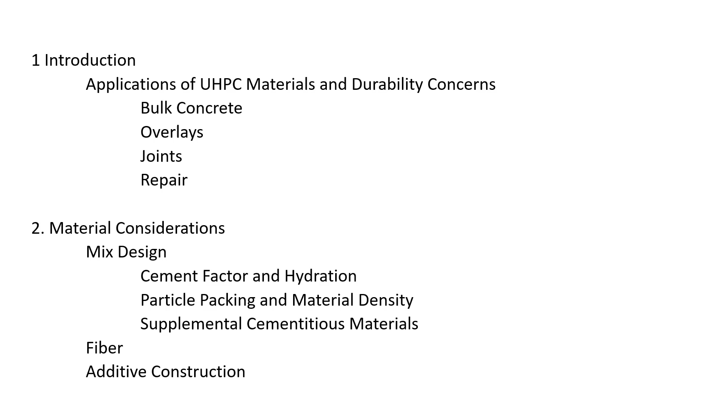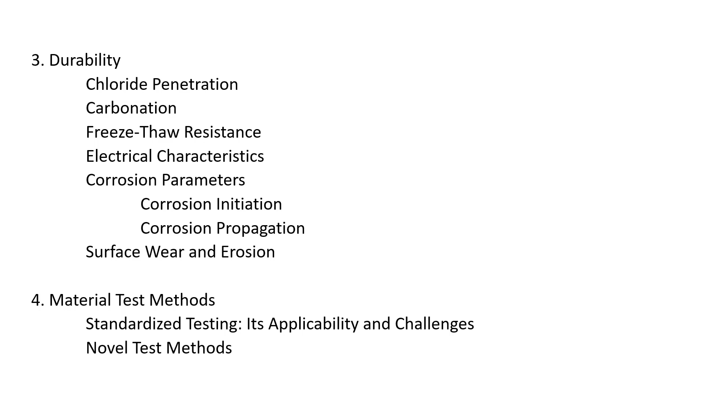Durability testing and durability behavior of UHPC, covering chloride penetration, carbonation, freeze and thaw, electrical characteristics, corrosion parameters, and surface wear and erosion or abrasion. Material testing covers the standard material testing methods for UHPC as well as novel testing methods, really focused on the durability aspect of UHPC.

Some case studies in section 5 of this chapter cover existing bridge construction, ABC, and other structural components, as well as challenges and the prognosis for future use of UHPC.

Chapter 9, Dr. David Garber from FIU is the leading author of this chapter. This chapter will have an introduction and a general introductory primer, mainly for concrete superstructure. Fully precast concrete superstructure includes section 3, covering different typical options for ABC.

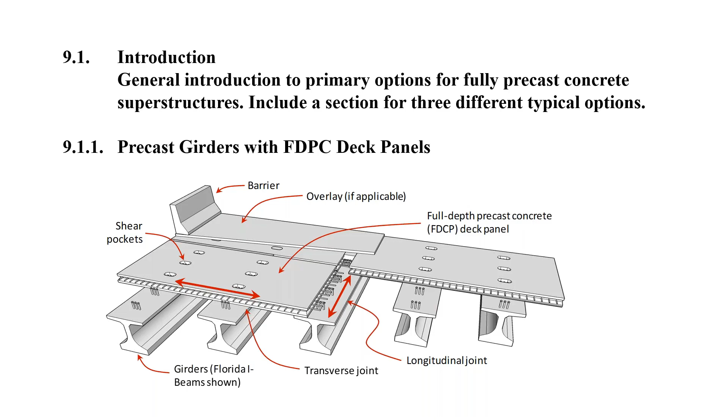The first option is precast girders with full-depth concrete deck panels, as you can see on the screen here. Other options include deck bulb T girders, and another option using adjacent precast beams.

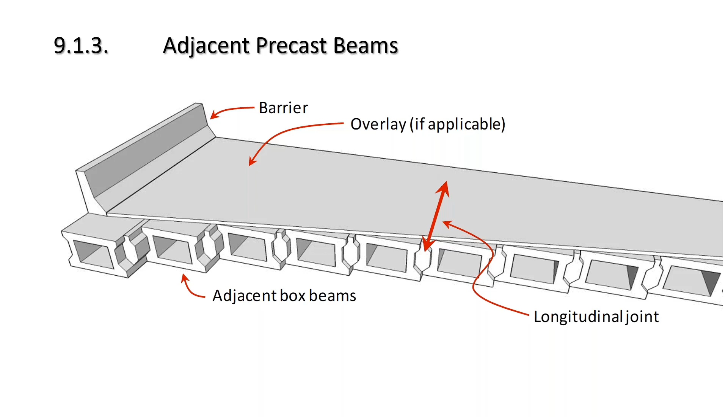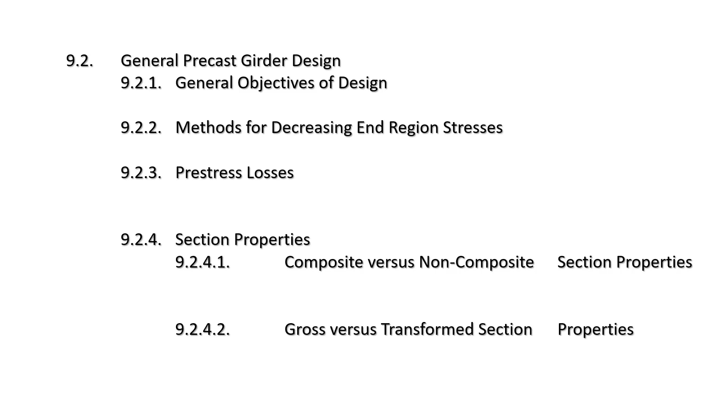Continuing, I don't want to keep reading the slide, but you will have a chapter in general precast design covering how to calculate the pre-stress losses, how to calculate the section properties for composite, non-composite, and transformed sections. A general design procedure with steps, from choosing the cross section up to the end of designing the end anchorage zone and reinforcement.

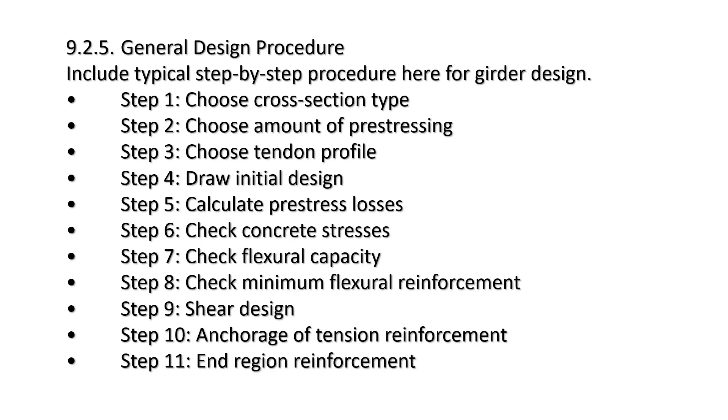Also covered are full depth deck panels, from the section of work that Dr. Garber conducted a few years back, and also the partial deck precast deck panels.

Chapter 10, I believe Dr. Murabi is the leading author for this one. This is almost a complete draft and hopefully will be included in the entire handbook as a chapter that Dr. Murabi is leading.

Chapter 12 is led by Dr. Bijan Khaleghi. He is leading the chapter related to ABC seismic considerations, with an introduction covering objectives, response characteristics of bridge systems and components, potential causes of earthquake damage in bridges, and seismic hazard and performance, mainly an overview of the effect of seismic activity on bridges.

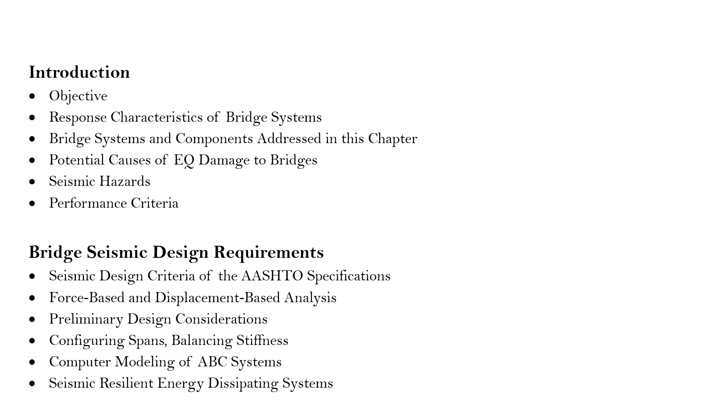The bridge seismic design requirement is the second outline section, covering seismic design criteria for AASHTO specifications, the difference between force-based and displacement-based analysis and design, preliminary design considerations, how to configure spans to balance stiffness, computer modeling for ABC systems, and seismic resilience systems with energy dissipating systems.

Structural considerations include foundation and all seismic protective systems, substructure elements, abutments including integral and semi-integral abutments, piers and wall piers, bent caps and open frame bents, and also soil-integrated bridge systems, which is another option for a seismic resistant frame system for bridges.

Details of current practice range from abutment connections to pile cap connections, superstructure continuity over piers, precast column to cap connections, segmental columns, and prefabricated concrete bridge systems.

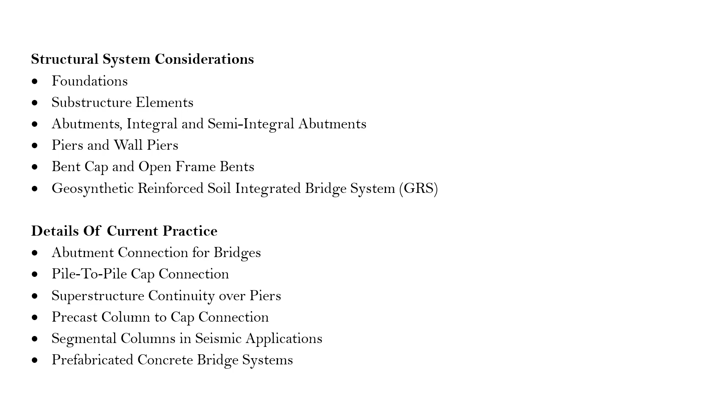Also covered is the application of seismic research on ABC bridge elements and systems: superstructure and continuity types, superstructure with emulative or hybrid connections, some systems for superstructure, substructure with self-centering capability using pre-stressed strands or tendons in either post-tension or pre-tension, and substructure with alternative energy dissipation mechanisms.

Chapter 14 is accelerated repair and upgrade. I'm leading this one. Basically we'll have an introduction, and you can expect to see different sections within this chapter.

The second section is accelerated repair of bridge superstructure, focused on the superstructure. You will have subsections on what type of damage occurs in the superstructure, materials for accelerated repair of superstructure, methods of repair, a summary of key accelerated repair techniques, and featured projects showing accelerated repair for superstructures.

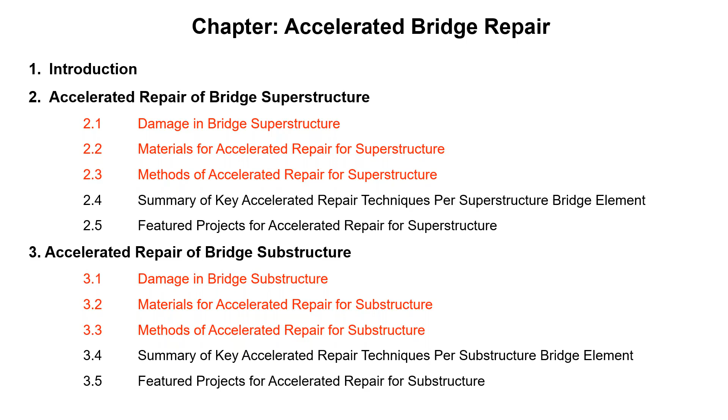The same concept applies to section 3, but for substructure. You will identify different damage in the substructure, what kind of materials are commonly used for accelerated repair of substructure, what methods are used, a summary of the most common techniques, and featured projects.

Section 4 focuses on foundation, covering all the different materials, methods, and featured projects for repairing bridge foundations if damage is located there. At the end there is a design decision section, conclusions, discussion, and references.

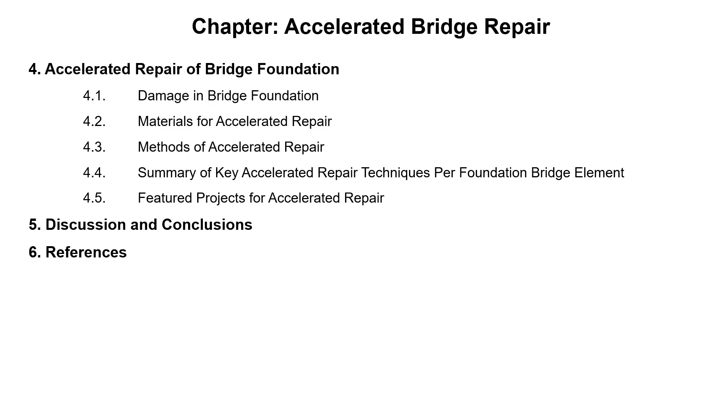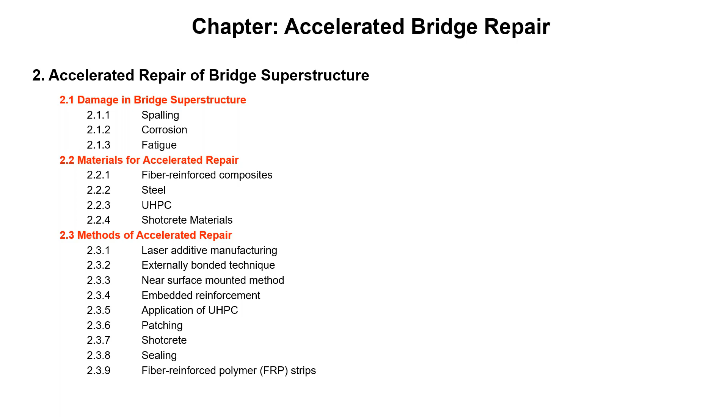To expand a bit on superstructure, you can see different types of damage: spalling, corrosion, fatigue. Different materials are used: fiber reinforced composite, steel, UHPC, and shotcrete materials. Different accelerated repair techniques range from application of flowable UHPC to shotcrete materials, patch sealing, and externally bonded techniques.

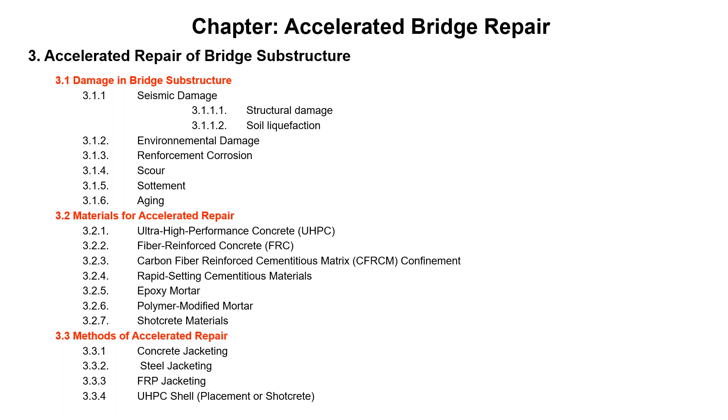The same can be applied to substructure, where damage also includes seismic damage, so you can expect structural damage due to seismic activity in columns, and you can also expect soil liquefaction.

Chapter 16 relates to design examples, which are used throughout the handbook, contributed by most of the leaders of the different chapters I mentioned. Chapter 16 will have design examples, as shown in the following slide, where I'm showing one of the examples for a folded steel plate girder.

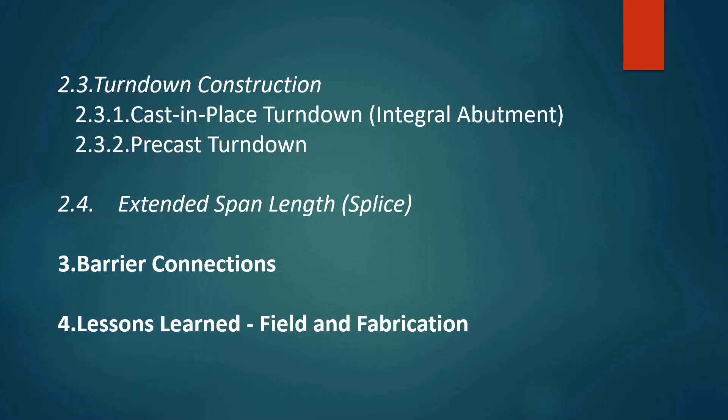You will expect in the chapter introduction an option alternative for the design for closure joint, either longitudinal or transverse, precast option, either full depth or partial depth. What is a turn down for construction, extended service life, span length, barrier connection, and also fabrication and field erection. And this is a lesson learned.

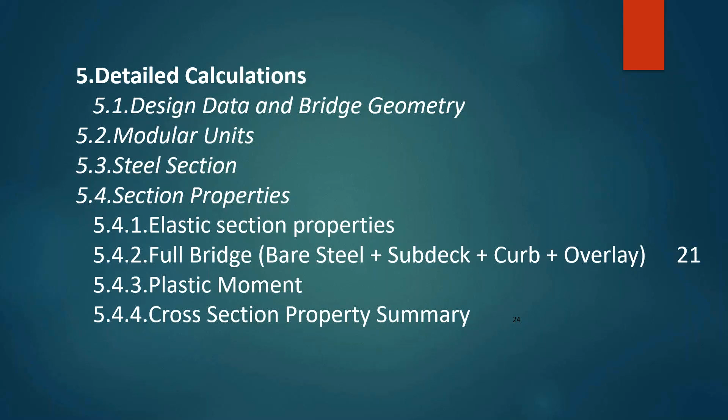You will have a detailed design calculation from the bridge geometry to modular unit to steel sections to calculating the elastic section, the full depth, full bridge section, plastic moment, and cross-section properties. You will expect to see the full design for structural analysis using multiple presence factor, live load distribution factor, and analysis for dead load DC1, DC2, and DW or live loads.

Summary of analysis similar to the table that is given in the FHWA example, so it can have similar familiarity for the profession. The limit state from strength, limit state to service to elastic deformation and permanent deformation. Also, there's going to be a section on fatigue and fracture for folded plate girders, from critical detail to fatigue 1, infinite, to fatigue 2,

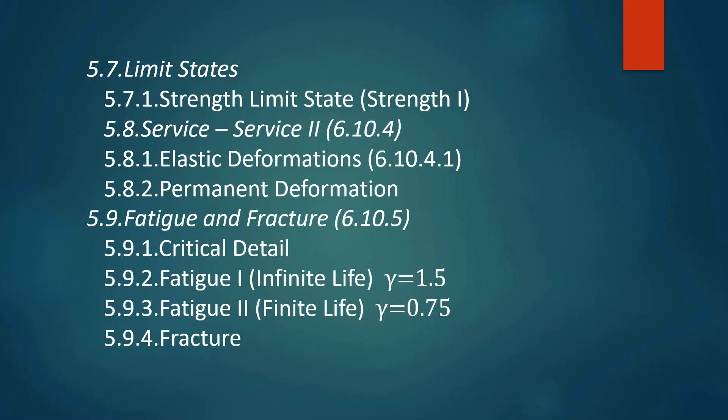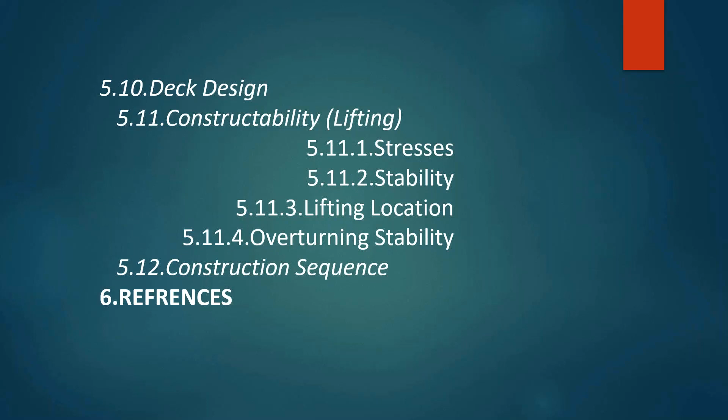finite life and fracture, and also design which is related to constructability during lifting, from stresses to stability to lifting location to overturning stability, especially if you have the unit that has barrier at the end, and also the construction sequence.

So in addition to that, the handbook also will have sections where you can scan a QR code to go to a web-based tool that is being developed right now at FIU to help the designers and professionals to quickly design, use it for designing new bridges.